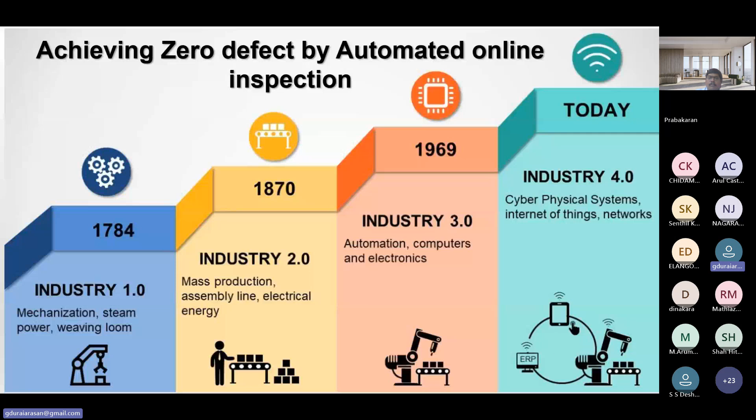Industry 4.0 now connects embedded systems, production technologies, and smart production processes to pave the way to a new technological age, which will radically transform industry and production value chains and business models.

This is really what we have connected. We have done a lot of improvements, and we want to highlight to our customer - also one of the customer comments - they are really interested in some of their products. They want to see complete online verification.

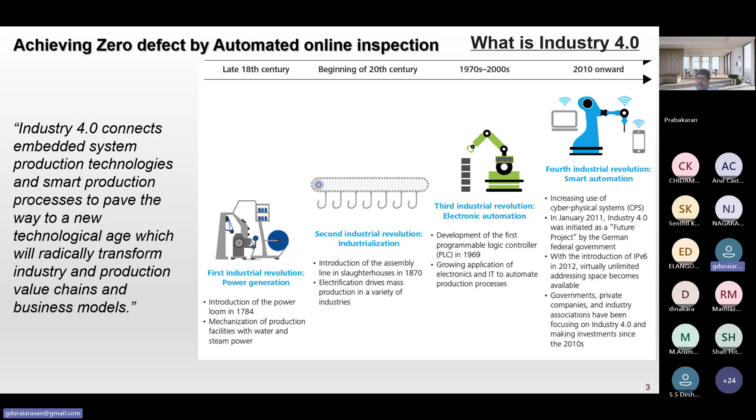Many customers now, before doing dispatch, want to see the casting quality with respect to visual or dimension, whatever it is - they want to see it online. Some people have a one-to-one camera system, some people are using a cloud system.

So achieving zero defect, Industry 4.0 really helps with cost reduction and customer satisfaction because the data transfer is fast and cheap, and also transparent with quality. So total customer satisfaction is happening - that is the main advantage.

In fact, maybe the initial investment during COVID time was high with respect to sensors or automation. What we are doing is automation according to customer requirement or drawing requirement. That cost, at that point in time, was high. Now the cost is really reducing - I am talking about investment cost.

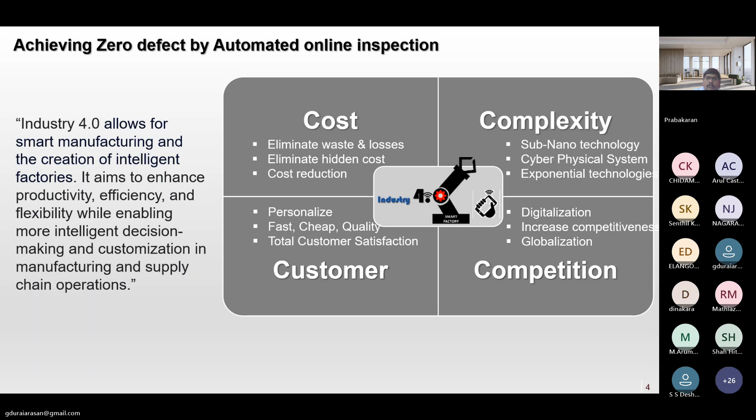This is one case study we want to tell. This part is a connection adapter - one is the part connection adapter. This part is used by Cummins. So local, domestic, and export - both components go with different drawing dimensions and also different part numbers. This is the part we started working on.

This part has 14 critical parameters, meaning CP, CPK parameters are 14 parameters. Normally we started working on CMM - generally CMM verification initially, then during production also CMM once per shift or twice per shift. But we want to do 100% inspection and 100% CPK value. The customer wants to see this, and similarly we want to monitor it too.

So we started working on accuracy - 1 micron accuracy we wanted to achieve. So with the support of people, we searched the market and identified many sensors, and I will show some of the sensors available in the market. In this case, we have used an LVDT probe and a laser sensor. This sensor we have used, and the characteristics with respect to specification here show 14 parameters of CP CPK dimension.

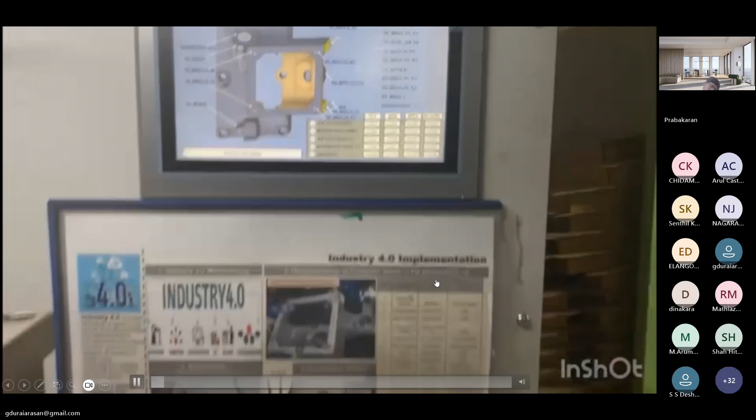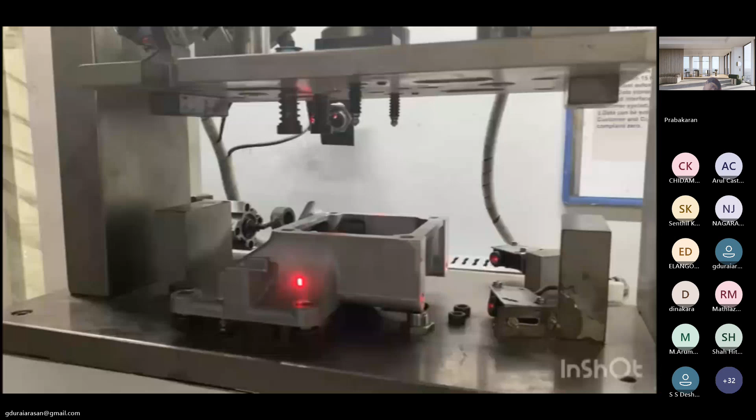So this is the probe fitted on top. Sensors are fitted on all the sides. So all the 14 parameters are checked. This hole position, hole presence, everything we have checked, and also flatness and thread presence.

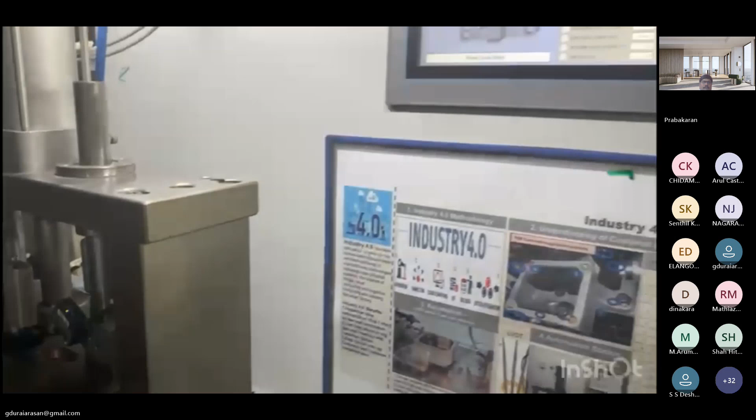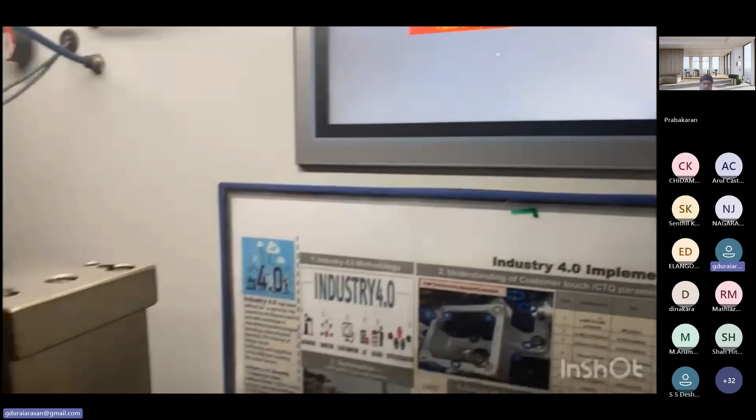This is each and every process, we want to have an OK master and not OK master. So before starting, the operator should check the machine is working well or not. So without the component, the operator just checks it there, places the component, the alarm is there. This is the model and part number verification also. If it's an export component or domestic component, that information also comes there. If everything is okay, the green verification indication comes.

And also, for each and every component, the traceability and live data is stored and interfaced with the customer system. So doing this, we started working.

We achieved really zero rejection, month on month and year on year. That is the major success with respect to this. And the total investment at that point of time was approximately 12 lakhs, I think. The same thing, if we want to do now, maybe 4 to 5 lakhs would be required, the total investment. The investment is almost reduced by, almost 70% reduced.

But earlier, we had more manpower with respect to 100% inspection. The manpower also we have reduced, and the customer also is happy with respect to this type of automation, and the customer wanted to implement it in all their castings. But we have done it for all critical components, not 100% of our components, but wherever the critical dimensions are more, there we have implemented it. This is one interesting case study.

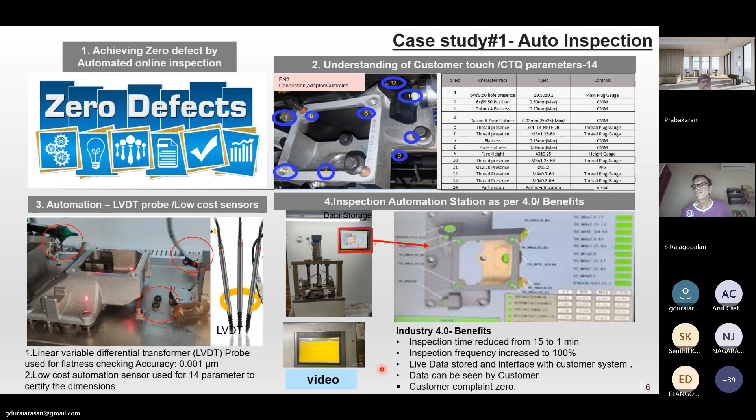This is another case study. Earlier I have communicated that a lot of low cost sensors are available in the market. Here the low cost sensor I'm indicating to all our foundry die casting friends.

The color sensor, touch sensor, ultrasonic sensor, alcohol sensor. Alcohol sensor normally we have implemented during gate entry, so if people used alcohol, operators or people coming inside, before we have given the sensor to the instrument to security. So they have controlled, they will send the people to medical or HR. This alcohol sensor, low cost sensor, is available.

Similarly, humidity sensor. All inspection standards room required humidity sensor. Similarly, air pressure sensor, gyro and acceleration sensor, hall sensor, soil sensor, proximity sensor, heartbeat sensor. We have not used some of these, but hospitals are using them. Infrared sensor, IR receiver, temperature sensor, light sensor.

Light sensors are commonly used by everyone. Nowadays light sensor is built in with the light itself. Then load sensor. Whenever we are applying load with respect to bearing pressing, bush pressing, or pin pressing, there we are using the low cost load sensor.

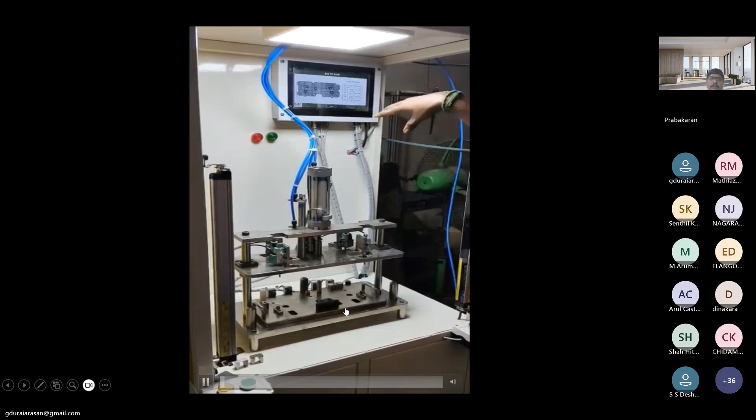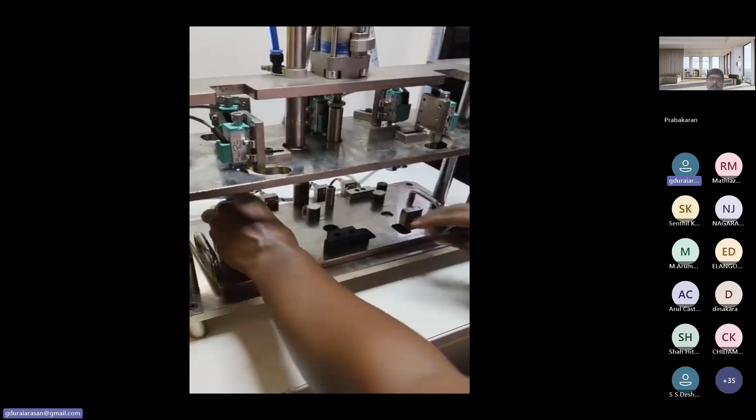So before, this is like okay component, okay master, not okay master. Similarly, we want to check and calibrate, make it zero. This we have made, each and every shift we need to verify, set zero. So now the operator makes set zero.

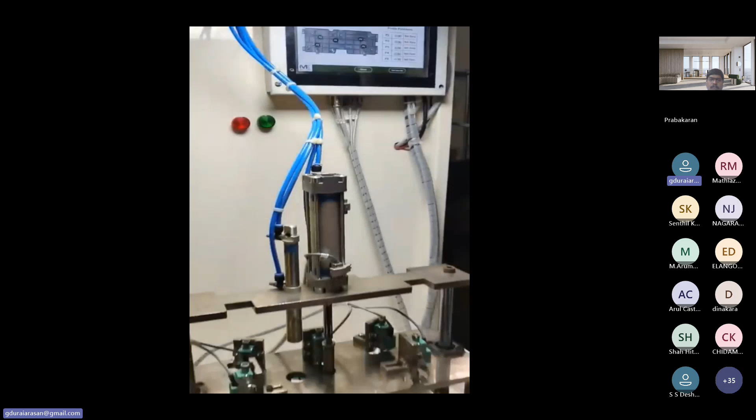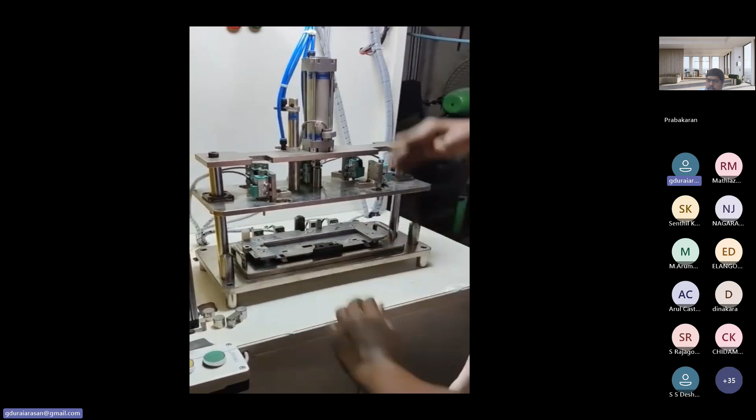All these probes made set zero. Now the component, with respect to customer touch point or customer assembly requirement, this is the okay part. So we have designed the fixture bottom side, top side. All sensors are mounted, as shown in the previous video, all sensors are mounted everywhere.

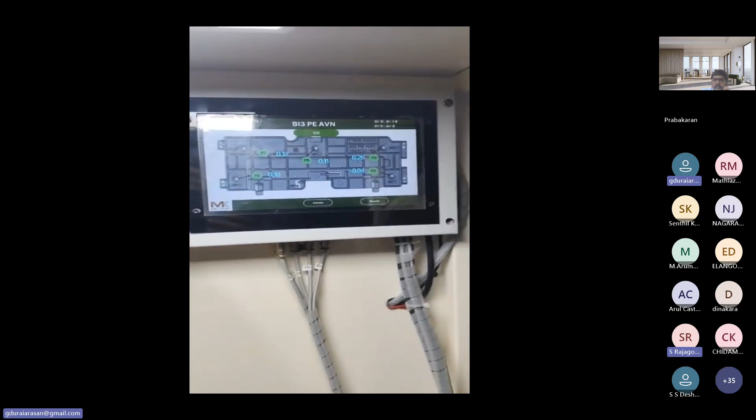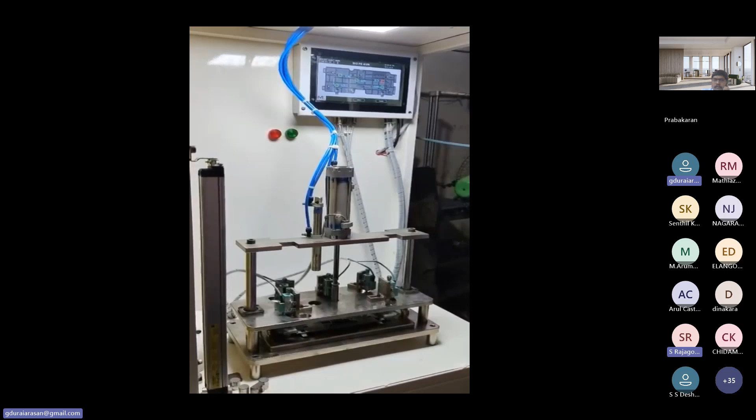In this case, top side, so okay is also punching. The component is okay, the green paint mark is done. This is the way all the required 5 locations are checked. The flatness is 100% ensured. Similarly, all hole openings, all thread presence, all pitch, hole, the mounting holes, pitch, everything is checked.

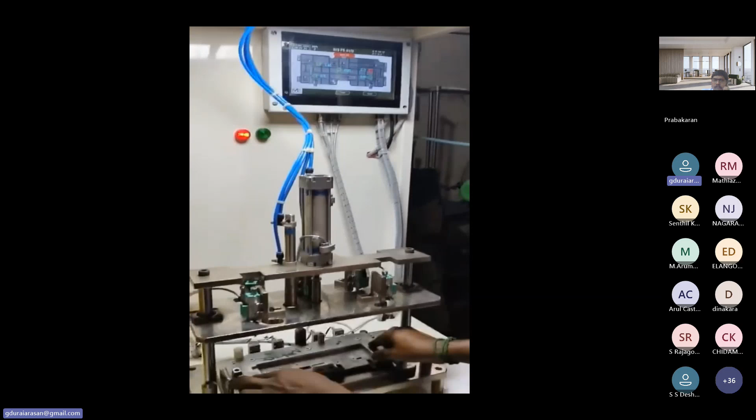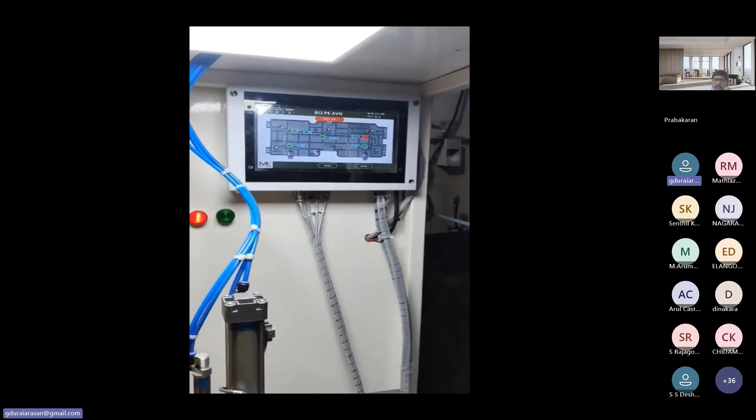Checked in seconds. The component is not okay with respect to bend or hole blockage. Hole blockage means the component will straight away not sit in the fixture. So with green paint, the operator will directly pack the component. This is one of warpage and all hole presence, flatness, thread availability checks. Even fettling defects can be captured, because the fixture is designed such a way.

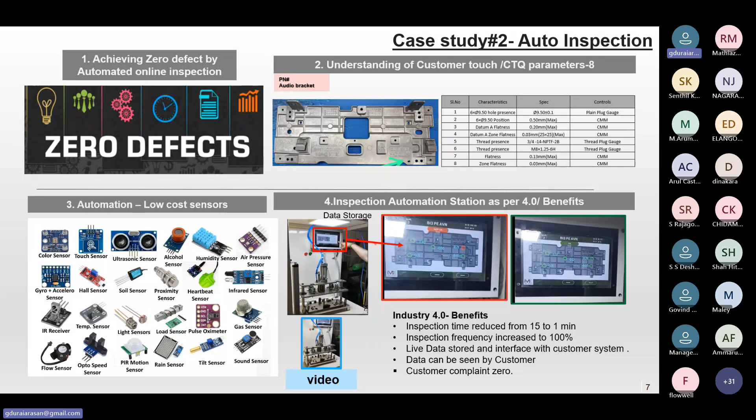This is case study 3. Now we want to use this aluminum component, which is assembled with 3 parts. So the component is aluminum. The 2 bushes we are using are plastic with a different color, black color.

Similarly, one pin bush also we are using, that is stainless steel. So we want to check during assembly if everything is available or properly assembled, or if anything is missing. So everything we want to check and confirm to customer. That is the customer requirement, because this part is directly used in one of the car manufacturers. It's a very critical component, a gearbox component.

So they don't want even a single part rejection, because the end customer is only going to test it. So a tier 1 supplier is going to do only the assembly.

So tier 2 car manufacturers test this. If the bush or the pin is missing entirely, they get huge noise during production and testing. So to avoid this, we introduced a color sensor and photo sensor. The color sensor identifies all parts are available, and the photo sensor confirms it's properly fixed. We want to verify both in one single fixture.

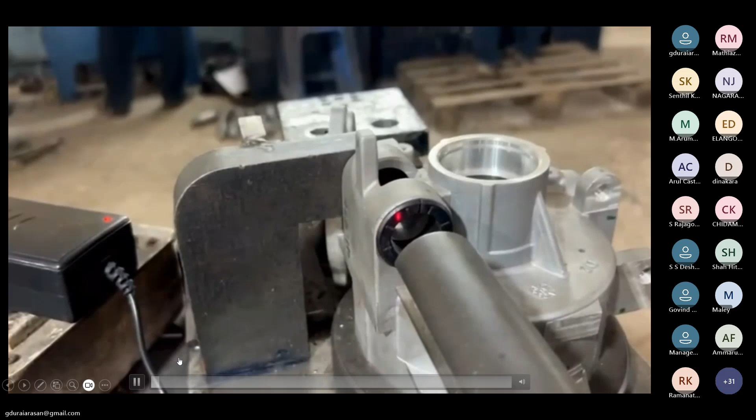This plastic part, black color part, and aluminum part - we use the color sensor here. You can see it's fixed in the fixture. This is for demo purposes.

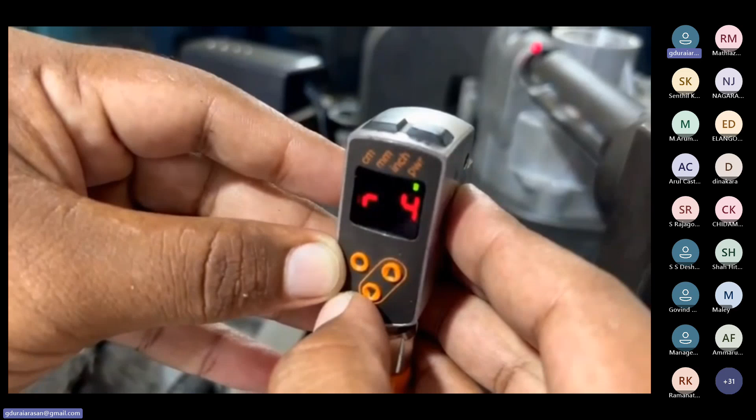This is without the bush. Without the bush, the reading shows C5. This color identification gives a signal to the operator, and also controls further operations. Further operation will be stopped through this, because after assembly we need to press the bush. So without this, the entire operation will stop.

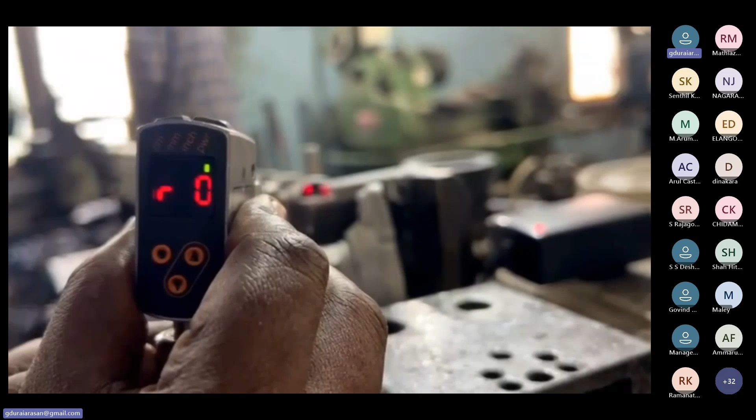This is 0 - the plastic part is available, meaning the green signal is there. The green and red signals are both available. This will be interfaced with our system.

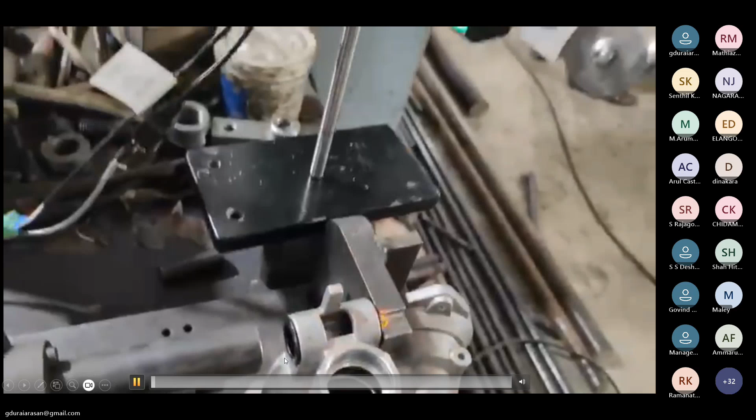The photo sensor I want to show to all our foundry friends. This is mounted on the fixture. See, the part is missing - then assembly will not work.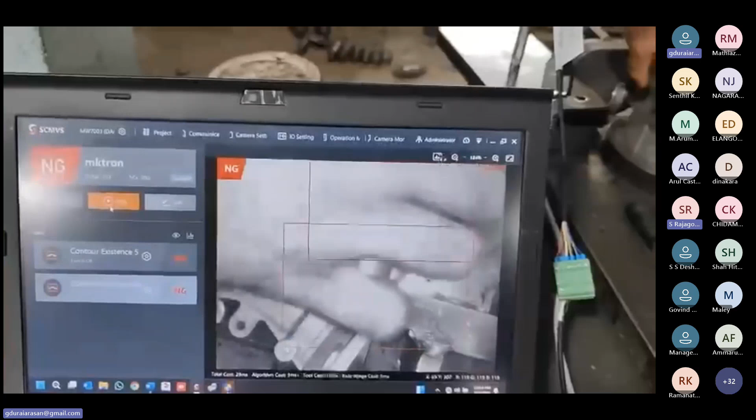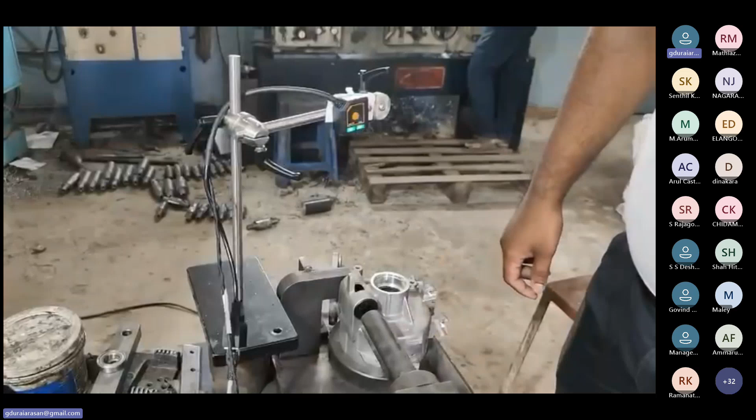Now we're getting the green and red signal. So the part is present, and the photo sensor will automatically detect it within the stipulated time. You can see the flashing now. So now the assembly is completed.

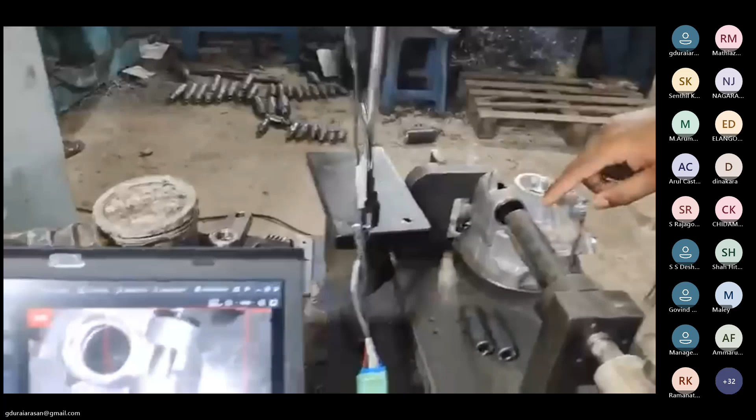This is not on the actual assembly line. For understanding purposes, we've taken it outside, because during assembly, finger injury may happen. So we want to show the audience how it works, and we've taken it outside the line.

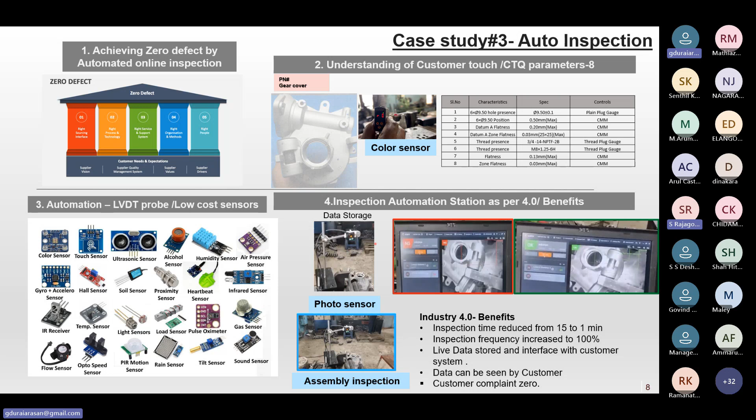This is another case study, here in the machine shop - we've implemented this in the machine shop. You can see the flow chart here. This is the start. We want to check the casting is okay with respect to some basic dimensions.

So incoming inspection is required, done by the operator in the quality station. In the quality station, you can see air sensors, gauges, plug gauges - everything is available, all interlinked with each and every machine. For example, incoming inspection is linked with the first VMC machine.

Similarly, whatever output comes from VMC one is linked with VMC two machine. This line has four VMC machines, and all four are linked with the quality system. This is the quality station, where we have a total of four VMC operations: OP10, 20, 30, 40.

All master samples are available, and incoming inspection on components is also available. The operator checks - if it's passing, he moves the component to VMC1. If the component is not passing or not achieving quality, the operator handles it differently.

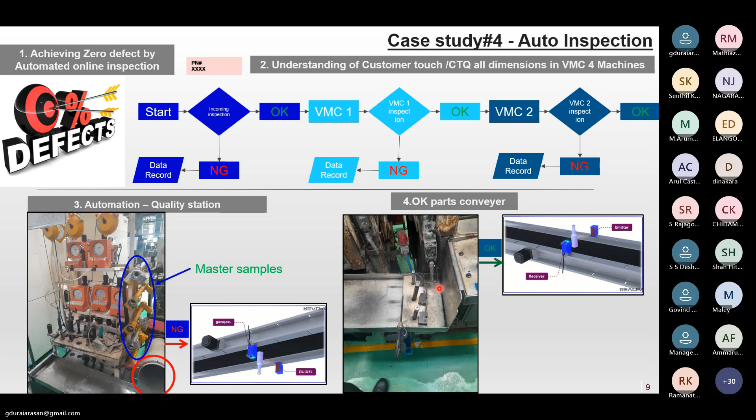Similarly, part mix-up: there are three models available, and we want to avoid that too. Similarly, height is one of the important dimensions, then parallelism, then total overall thickness, then multi-gauge verification punch.

The customer wants to ensure the component is checked 100% through this automated online inspection. The customer also wants traceability linked in. Finally, if everything is okay, the barcode will come out on the machine, and the same barcode will be pasted on the component for customer reference.

This is a simple station, and the PLC shows how all the dimensions are now captured, with the green color. Similarly, yellow is our next operation, barcode printing, and everything is interfaced.

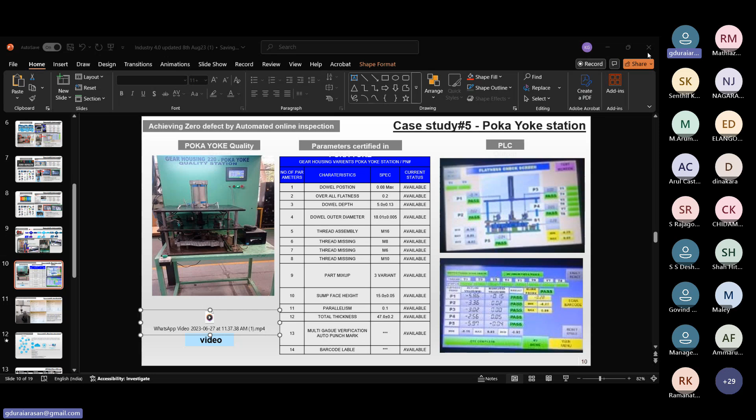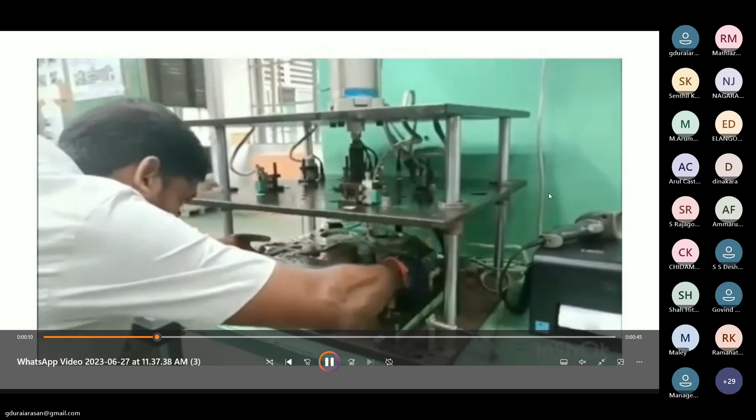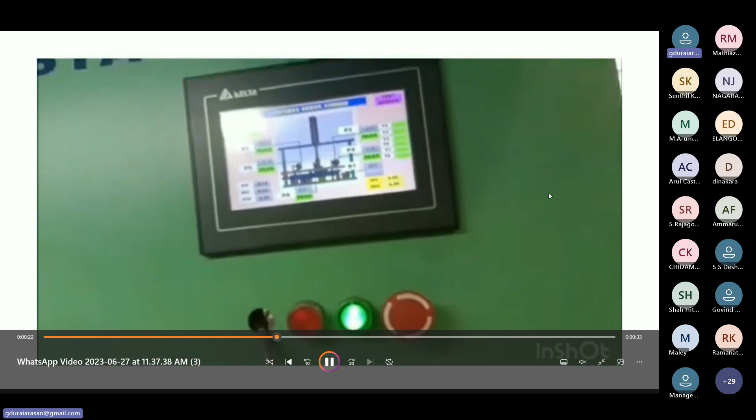Now it's fine, sir. Now it is visible. Yes, sir, yes, sir. Okay. Some of our friends are typing, maybe some questions, I don't know. Maybe I will answer all the requirements at the end of the presentation.

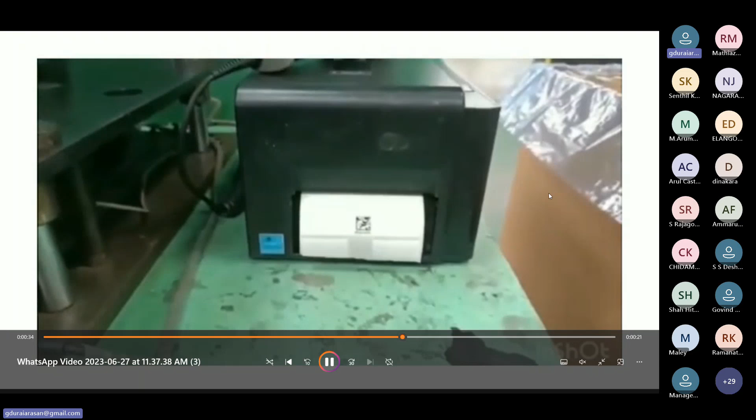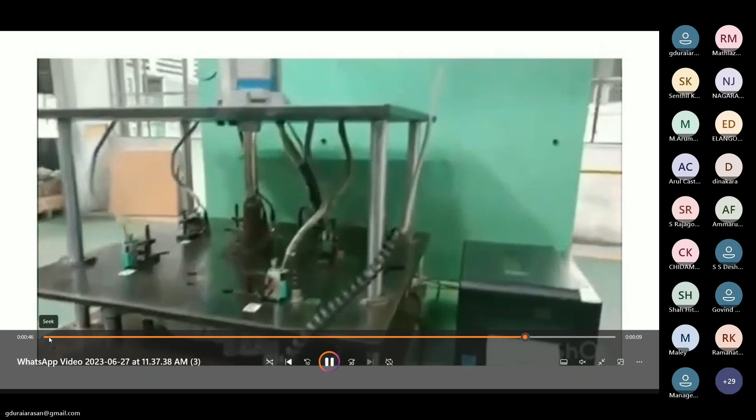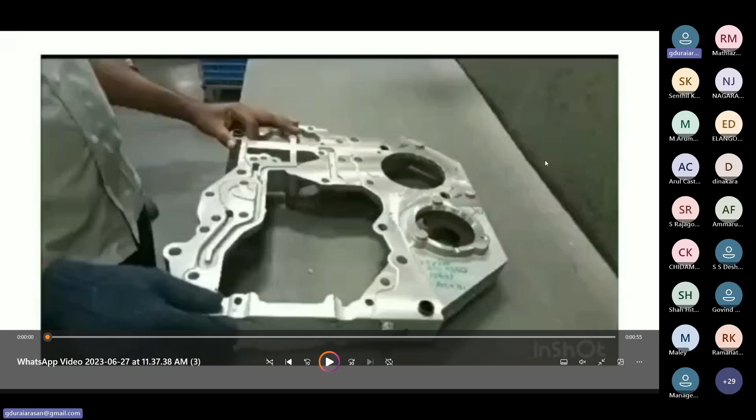This barcode label is coming out after inspection. It is pasted again and scanned, so everything is recorded there for traceability. Everything is completed in less than 1 minute.

This is case study 6. Every die caster or every machine shop has a CMM. We want to use the same CMM with small improvements with respect to CP/CPK monitoring.

So every shift or every day we are doing inspection. All the critical parameters or CP/CPK dimensions are recorded, and automatically CP/CPK data is available for our operator. If the CPK or CP value is low, it's identified immediately each and every shift.

This is accumulation of few days or few shifts of components, but for each and every five components we can communicate to shop floor people for correction, whatever it is.

Here's what we have done: generally CMM inspection takes normal time, so we make our own fixture and do the check. But in this case, the customer's assembly method, with the same torque value and the same type of fixture, has been replicated in the CMM, and the component is mounted in the same way.

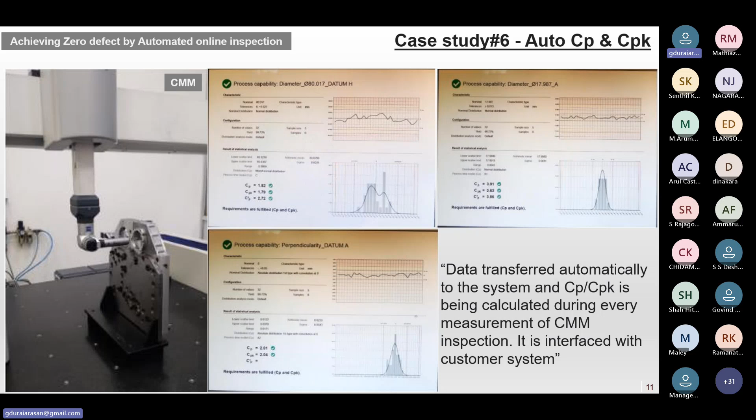So however the customer does assembly, what type and how many bolts are used, what torque, everything we have replicated in the CMM, so that whatever we check every day, every shift, during patrol inspection or first-off inspection, everything data will be shared to the customer by CP/CPK value, and the customer can see the same in their system. I'll move to the next case study.

This is the shop floor in the die casting machine. A lot of sensors, which we have seen earlier, are all connected with respect to requirement. For example, we want to identify downtime, how productivity is going, how quality is there.

Then what parameters have we optimized, and are the optimized parameters 100% adhered to or not. And also with lower manpower or lower cost in the shop floor, we can deploy this. Capacity gaps or capacity cycle time, everything we can verify. Similarly, the maintenance person can verify all the input data like downtime, and why the downtime occurred.

Everything can be monitored, controlled, and improved through these sensors. The sensor will be connected to a router, which will give communication to our quality system, computer, or PC. Then that data will be moved to the cloud through IoT. A lot of free cloud space is available, or paid service also available, which we can use. Similarly, everything will be monitored by the customer.

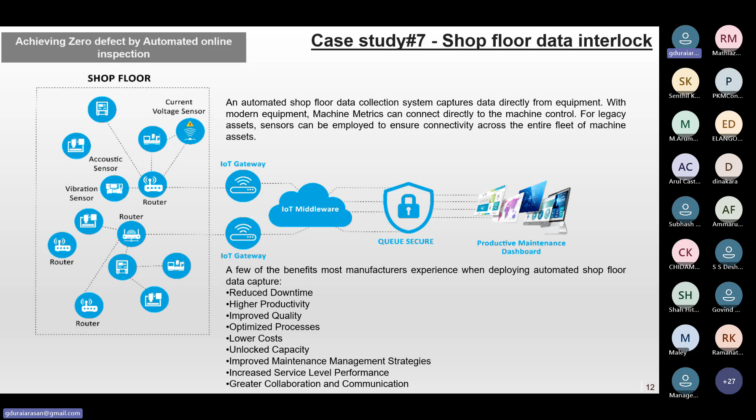This is some of the critical IoT work: a connected sensor fixed on the motor. Normally the coolant motor or power pack motor are both important for CNC machine accuracy. There, the motor temperature, hydraulic pressure, and hydraulic temperature will be monitored every few seconds, continuously.

At the same time, if anything abnormal happens—temperature going up or pressure going down or up—we immediately get communication through SMS. Most of our supervisors are doing troubleshooting on the shop floor, so they can get immediate, continuous messages each and every cycle.

The message will go to mobile. This is the way we have connected all the parameters like oil temperature, oil pressure, panel temperature, vibration on spindle, vibration on foundation, vibration on fixture, vibration on tool—everything we can monitor.

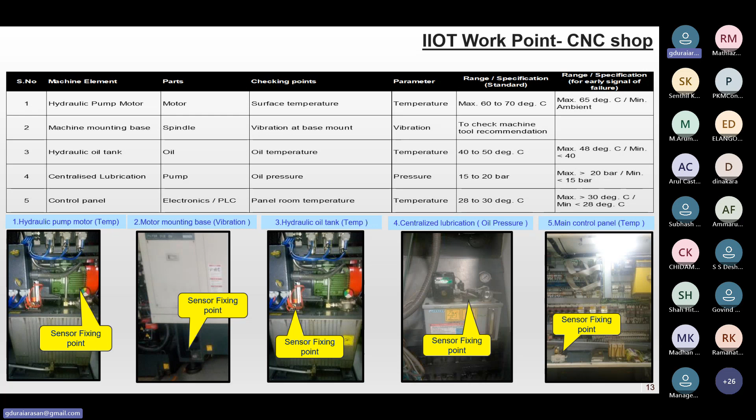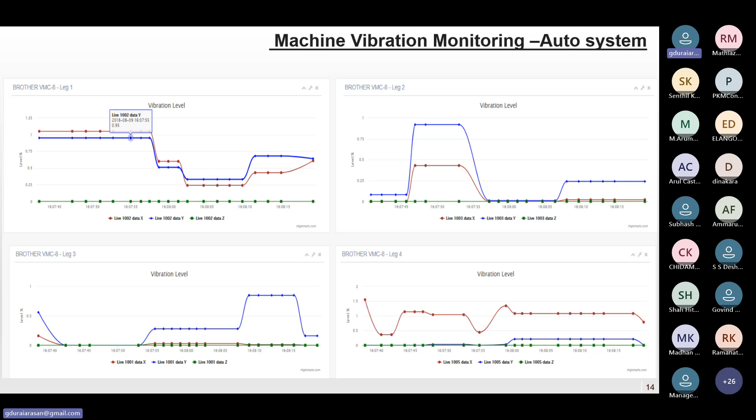This is the machine vibration monitoring. It automatically updates—see the readings 160745, 160750. This is the way it continuously monitors, so these are complete live data we can get. This is not old data; this is live data taken from each and every CNC machine.

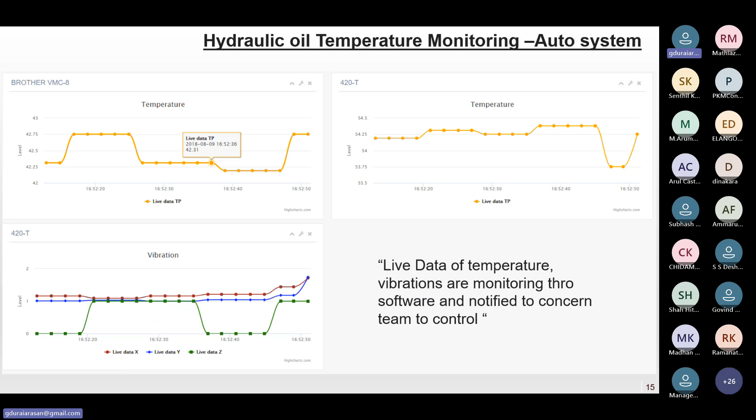Similarly, temperature and vibration, everything we can monitor. See, there is an up and down, maybe because of this—the level is 42.25 and 42.7, a small variation. Even a small variation in temperature, for example 0.5 degree, will be detected. The sensors will detect and record it.

Next, this is die casting. The die casting process is interesting—many people struggle on the shop floor because of multiple variable parameters or semi-variable parameters. So we are trying to reduce the variation.

Variable parameters will be controlled to become semi-variable parameters. Similarly, we want to fix semi-variable parameters into fixed parameters. This is the success of quality and productivity—normally variable to semi-variable, semi-variable to fixed. If all the parameters are fixed, then our process is stable.

Here are some photos of what we have implemented on the shop floor. Once the metal level is low, a signal automatically goes to the melting department. This machine, the HPDC machine, and the melting shop are connected through an interlock. We don't want to stop the machine after it goes empty, so during low level itself, an indication goes to the melting department so they can pour metal before it becomes empty. This is one type of interlock we have done between the holding furnace and the melting shop.

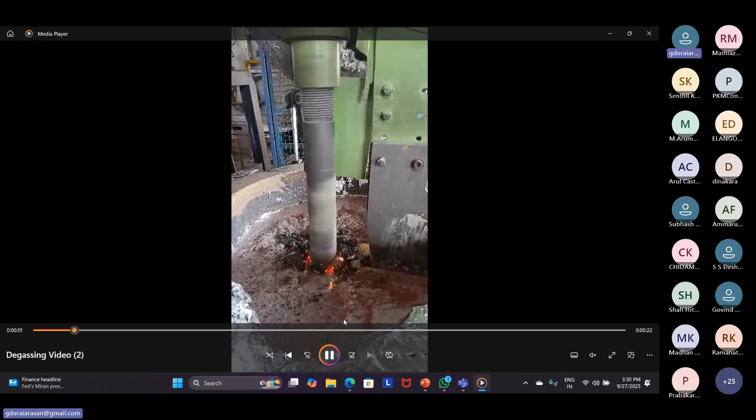Hello, screen is visible. Yes, sir. Okay.

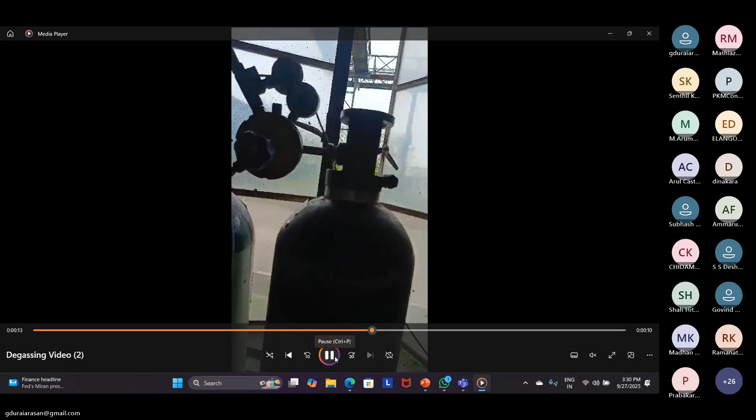Normally these additional sensors, we have added everywhere. The system is already available. Some of the sensors only we have added. Yeah, this is oil sensor. This is flow sensor.

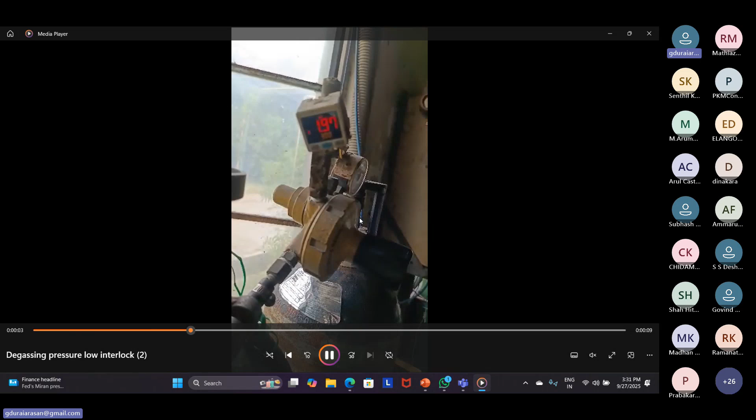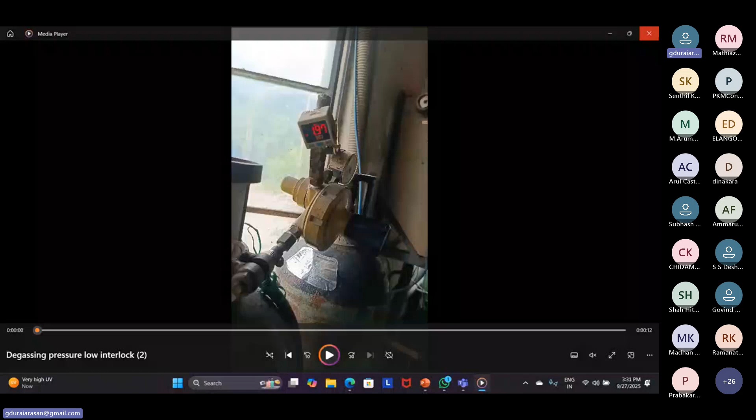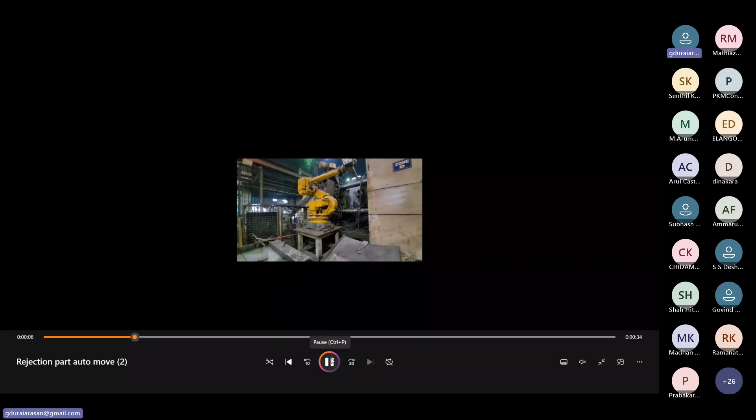This is parameters and rejection accounting with respect to process parameter, how the component is rejected. We have different chutes, okay part one chute and not okay part one chute, and the same thing is accounted in the machine. End of the day, how many parts are rejected because of process parameter variation, that can be taken.

This is NG part. This OK part normally comes to the chute. The rejection part goes straight away to the red bin.

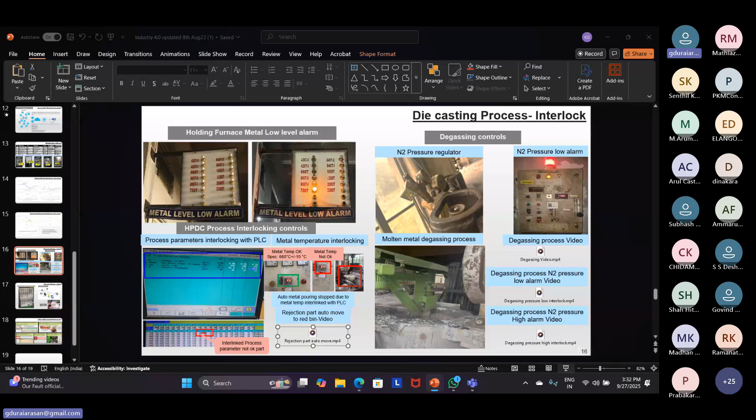This is one of the requirements of Maruti. Whenever Maruti comes for audit, or Maruti suppliers, tier one supplier, tier one customer comes to tier two supplier, this is the basic thing now they are expecting. Next.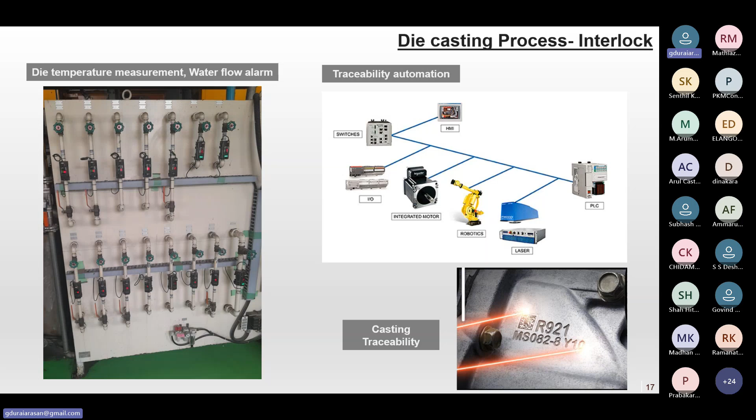Similarly, in CNC washing, some of the interlocks at the same time, the potential rejections happening outside of machines - normally the coolant flow, the coolant system in some of the machines. So CNC machine coolant system is inbuilt in some, some systems the coolant is not inbuilt, it is outside. So we want to get operator messages with respect to coolant pressure, coolant flow, so everything.

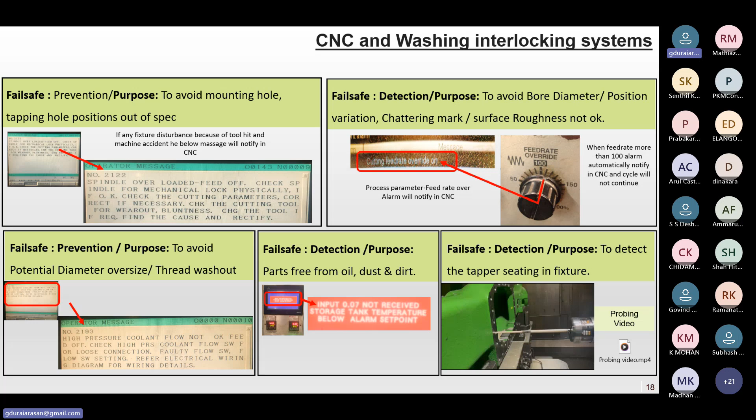This is the probing system. Similarly, this is in the component where it is mounting, that we can check. We can put the probe in the fixture itself. Some cases in the fixture, some cases in the machine itself. We can link it with the machine. When the pressure is getting lower, the machine will stop.